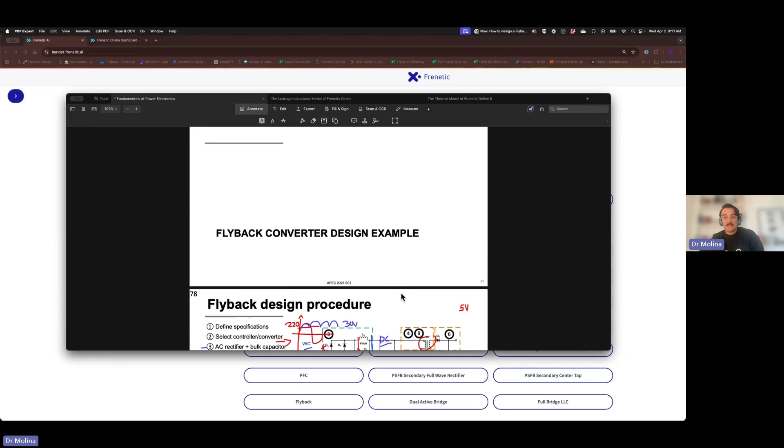The first one was done by Pradeep. I'm in contact with him. He's an amazing power electronics engineer and manager. And the other one was by Brian King, who did an excellent presentation. And they explain a procedure for designing a flyback. They talk about the specifications, choosing a controller, then, considering that the flyback is connected to the grid, choosing the AC rectifier plus the capacitor, and some basic calculations for the transformer that are going to affect the rest of the design.

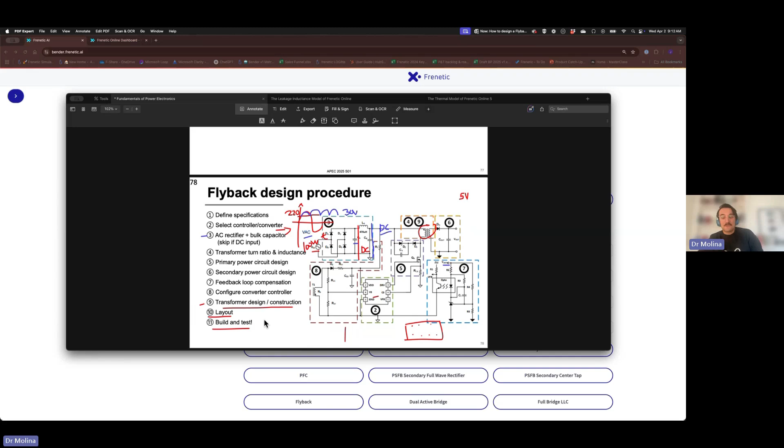And then choosing the semiconductors, closing the feedback loop, and then there is a point here, the transformer design and construction. We will go more in detail. So for this example, they choose a plug-in air quality monitor of 10 watts, and then they create these specs.

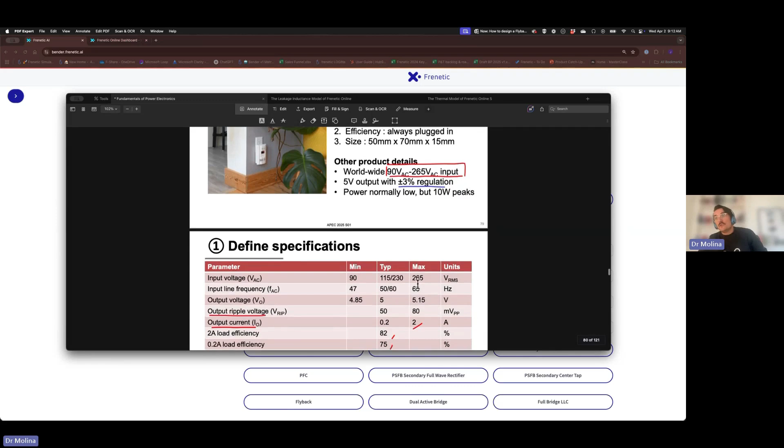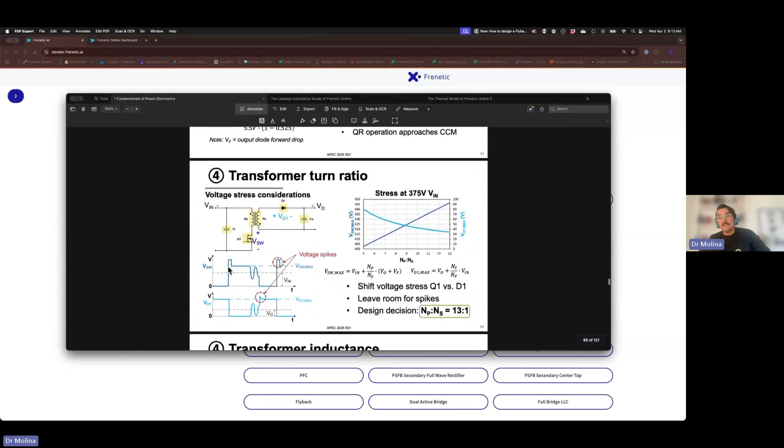So when you analyze all these steps here, if you take a look at this presentation that probably will be online at some point, free for everyone, you will see that there are a lot of equations and design decisions and all this stuff. So what I did is I created a Python code for doing all these steps at once. So just putting the input voltage, output voltage, and the power, this system can just create your case.

So if I update this to a 40 watts flyback, and I run this here, we can see the information to choose the right capacitor at the input, and the controller design that actually was the most interesting for me, because this is an IC controller from Texas Instruments for flybacks, and the part that is more critical for me is to choose all the parameters for that controller design.

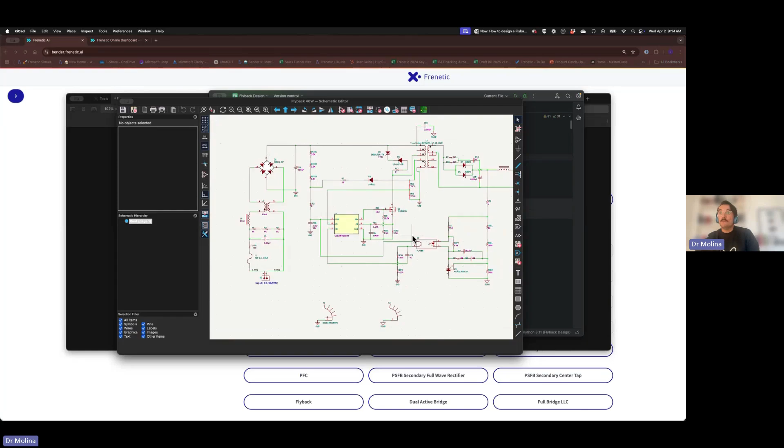So assuming that we want to have some specifications of ripple in the output, current ripple, this chooses all the parameters of the inductors, of the resistors and capacitors for that case. And then I connected all this information with a KiCad project here, a schematic, and now I'm working also on the PCB. I will leave this open at some point for everybody, and it will be integrated in Frenetic AI, where all the resistors are calculated in the other code.

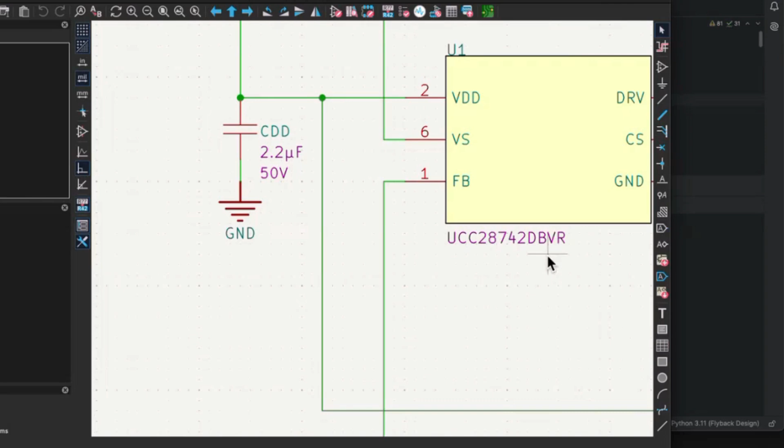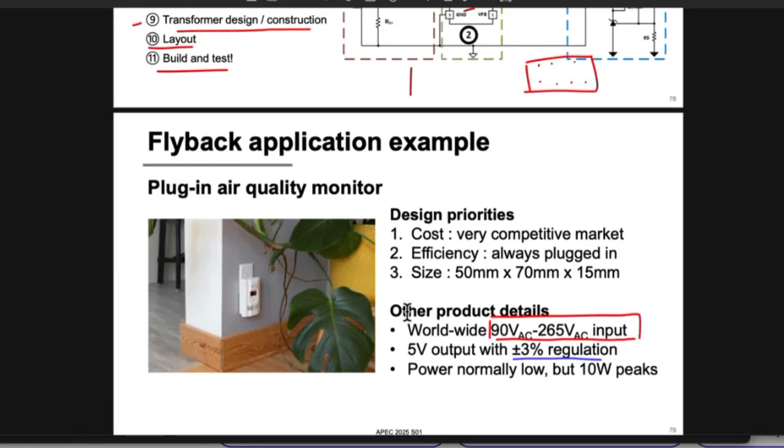So if you want to design this flyback using the UCC28742, this is going to do most of the job automatically. But when I spent a few hours doing this process proposed by TI, I realized that there is one point that is not explained at all. They work on the selection of the device, everything, the calculation of the turns ratio of the transformer.

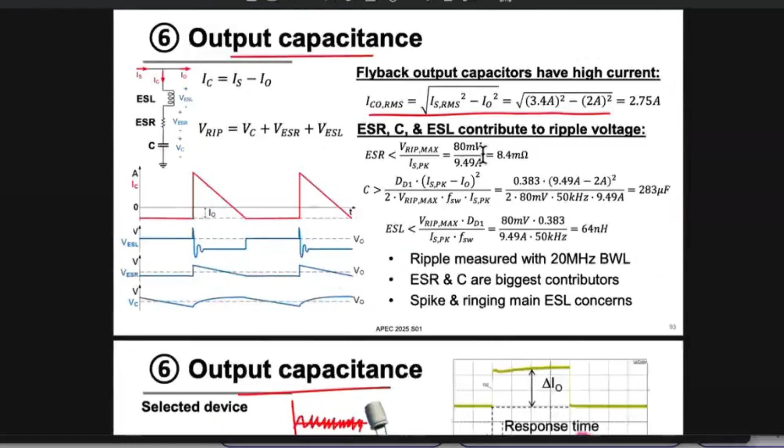But at some point we arrive at the transformer, and I remember in the presentation that Brian said, okay, go to the exhibition hall and look for somebody that is going to help you make the design, because it's not so simple. So you can see here, they just describe the specification for a supplier. So what I'm going to do today is explain to you a little bit what you can do here and why the first step is so important. So take a look at this information here.

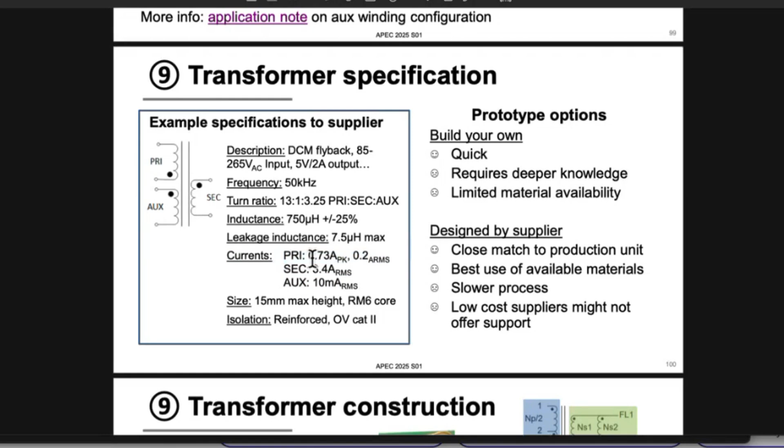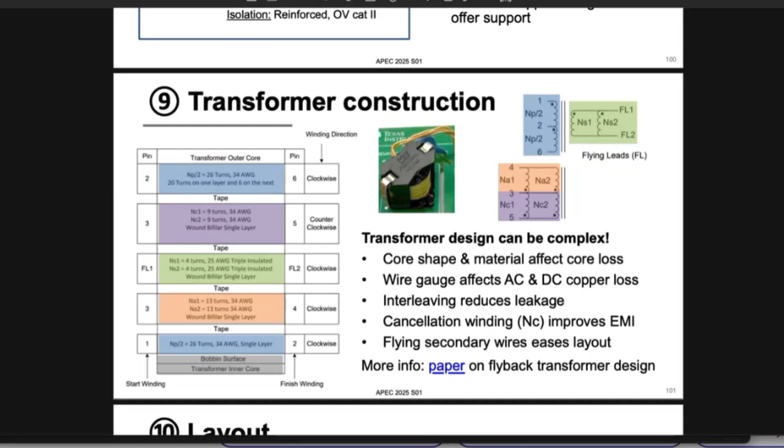So once the design of parameters like turns ratio, inductance, and even selecting a switching frequency are done, then you have to calculate, here there are some calculations of the peak current, the RMS current in the primary, in the secondary, and the auxiliary. And they show you this construction for this transformer. If you look in the paper that they are talking about here, you will see a description. Let me show that to you. You will see a description like this.

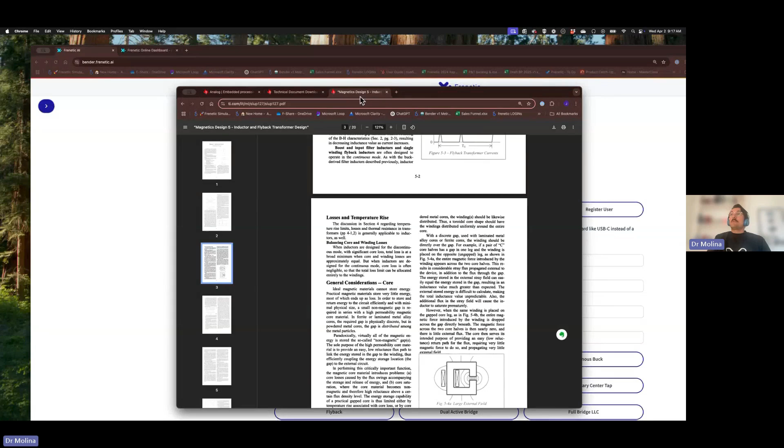Yeah, this paper is more than 30 years old, and it's very, very nice. It explains to you how to choose the core. But if you go into more detail, you realize that the losses, especially the proximity losses, are just a kind of approximation using Dowell parameters. So, we have a clear process according to this TI document for the whole converter, but for the transformer, or the magnetic, depending on how you want to call it,

we don't have a procedure. So what I want to show you today is that for that component, the way that I see that procedure is in these three steps. The first step is that we need to define the waveforms and the operating conditions that we will use for the design. Because at the end, when you're designing a magnetic, you are going to choose a core, choose a winding, and decide how you want both things to be positioned, and then simulate and iterate on how the losses of these selections are working.

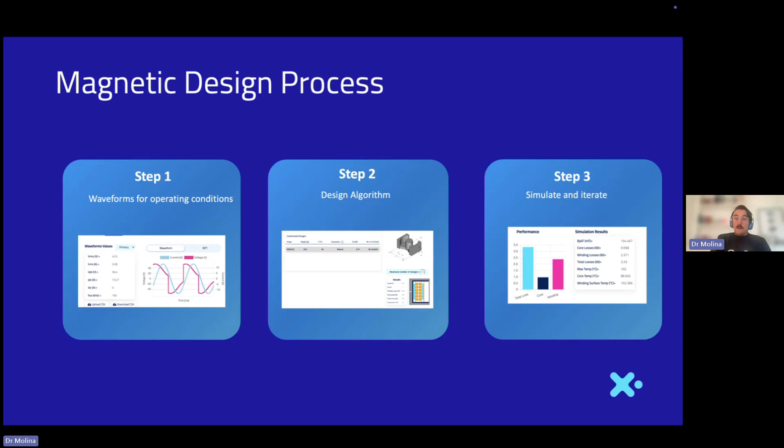In the middle, we have the design algorithm. So if we already have the initial specs and we want a prediction, first we have to make the design. In our case, we have our own algorithm, and every manufacturer or every person can have their own algorithm. But today we are going to focus on step one. I'm going to explain why step one is so important and how it can affect your results at the end if you don't do it properly. So let's move that bar.

So first I'm going to create the design for that spec. Let's say 200 volts input, or that was like a 150 volts input, 20 volts output, and 40 watts.

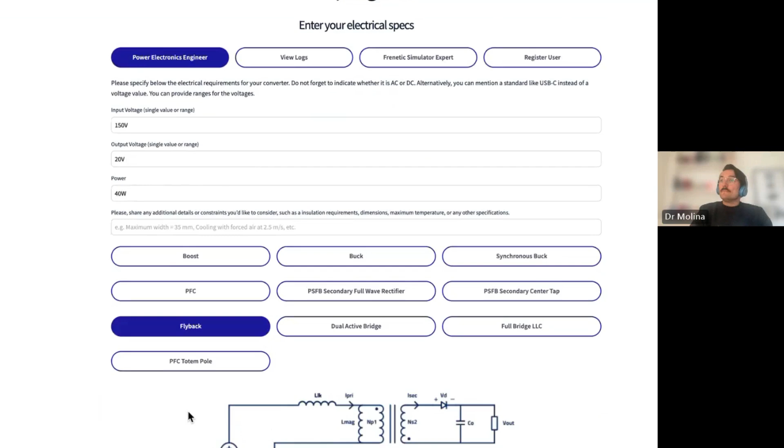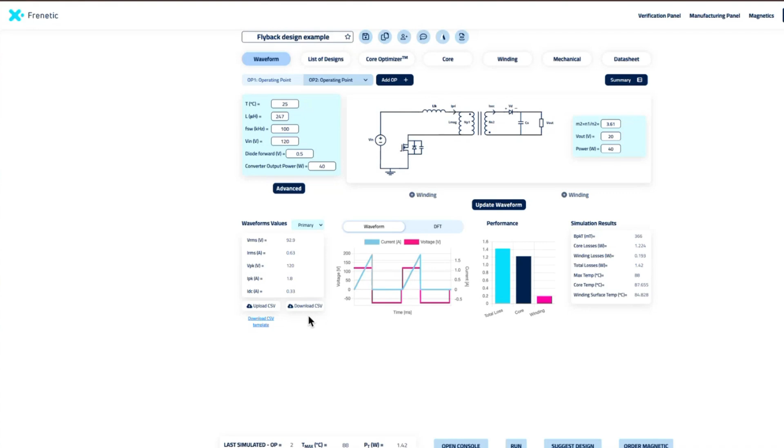And while this is doing the calculation for the design, I'm going to move directly to the flyback case of the magnetic, because here we are just generating the design. But assuming that we already have those values, and I'm using Frenetic because it's our tool, but you can do this by your own, or manually, or however you want to do it.

So, as you can see here in this flyback, what we have here is some specifications regarding the parameters like the inductance, the frequency, voltage, and power. And these specifications, which correspond with the specifications that we saw previously in the TI document, are the ones that we are going to use to generate a waveform.

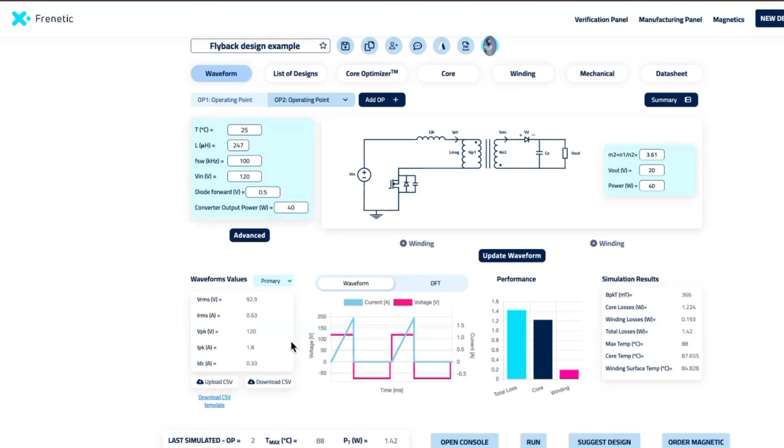20 volts. Let me see what is the proposal of the turns ratio. Turns ratio is 7.5. 7. So as you can see, there are no waveforms. So there are no values to make any kind of design.

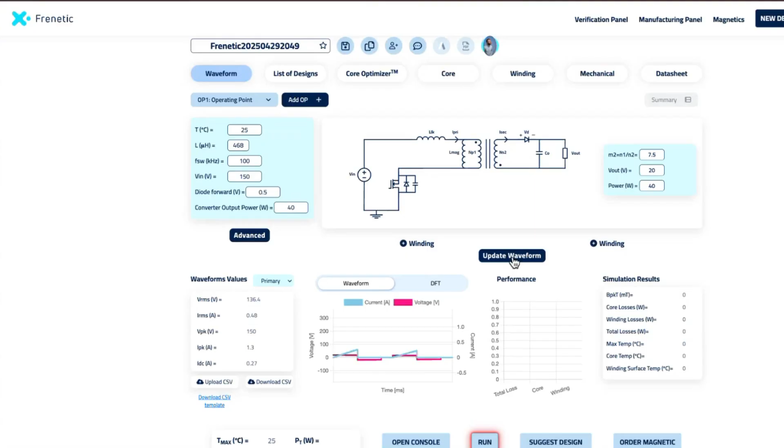So now what we are doing is, okay, now we generate the waveforms. And the most important part here, we generate the values of RMS, peak voltage, peak current, and well, the DC current is not going to be very relevant at this moment, but also we have that value. And we can see that for each winding. In this case, we have only primary and secondary, but you can have more windings.

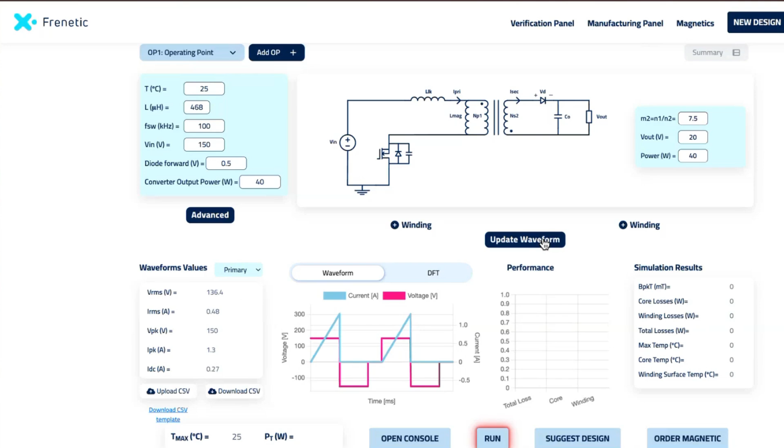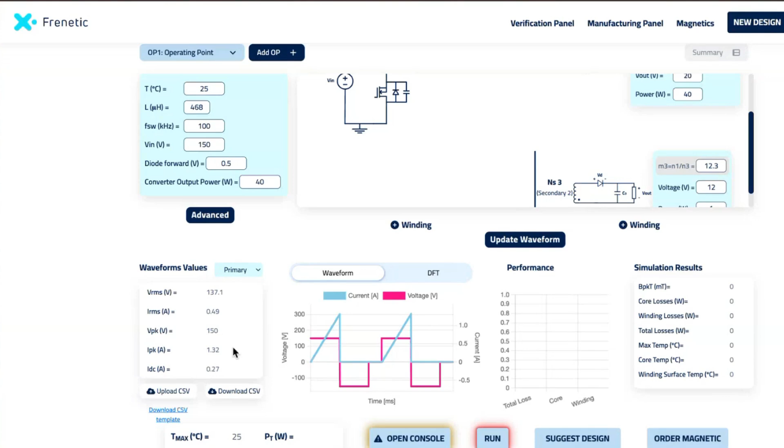Let's say that you have an auxiliary, another secondary that is here for 12 volts and for just 1 watt. So if you have that, then you have another secondary. And again, you have to check here the RMS current and all the information for doing that design. And why is this so relevant? The main reason is that these parameters are going to be changing when you're doing the design in all the conditions.

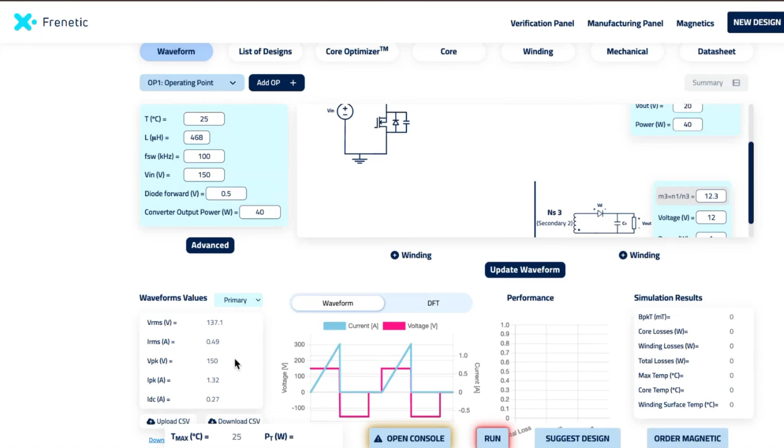Let's say that you're doing the design for that controller that Texas proposed. If you check the controller, you realize that the controller maximum duty cycle is 0.5, and that there is a variable frequency depending on the load. So there are some frequency variations. So if I change, look at this number, for example, here, 0.49, and the RMS voltage 137. If I change this value here,

this is changing, and this is changing just because I changed the frequency, but it's going to change for every point. So if I add another operating condition and say, okay, this is going to be 50, what I can see in a kind of report is that the values for the peak are going to be very different. For example, in the secondary, the peak current difference is 50%. So it's very, very relevant.

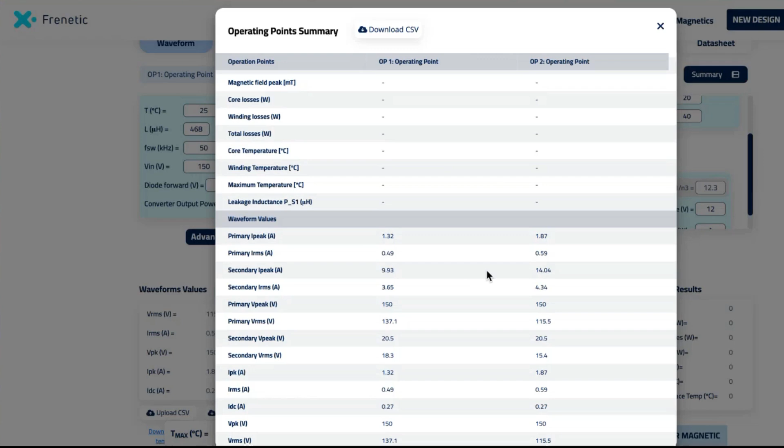And the problem is that if you are not taking all this information for your design, it's impossible to really get the calculations that you will need for the future, for the predictions of the losses and everything. So, for example, let me create a design here. If I create a design, this is my step 2, and step 2 is using our algorithm, but you can use your own algorithm. But I'm going to use it for showing you the impact on the losses for those cases.

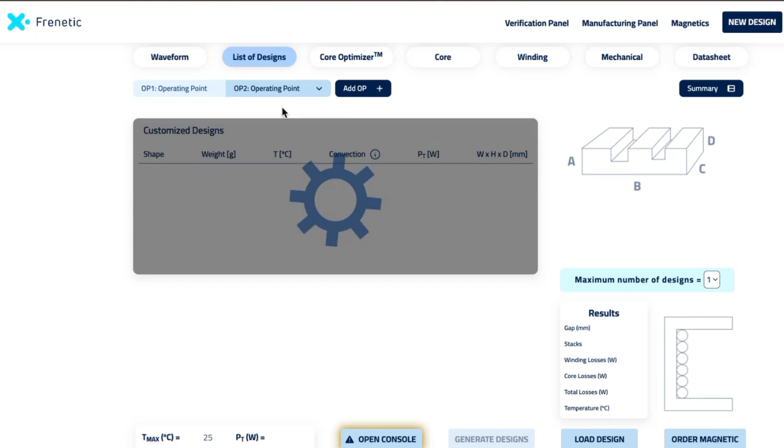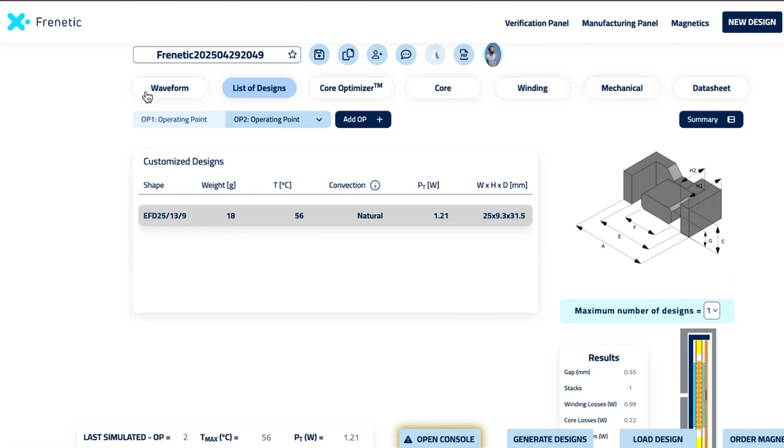Let the design finish. Here we can see, okay, we have a design. Let's load the design. So now we have used the conditions for the design on operating point 2, that means 50 kilohertz. And now if we analyze the losses for these 50 kilohertz and 100 kilohertz, sorry, that was actually in point 1.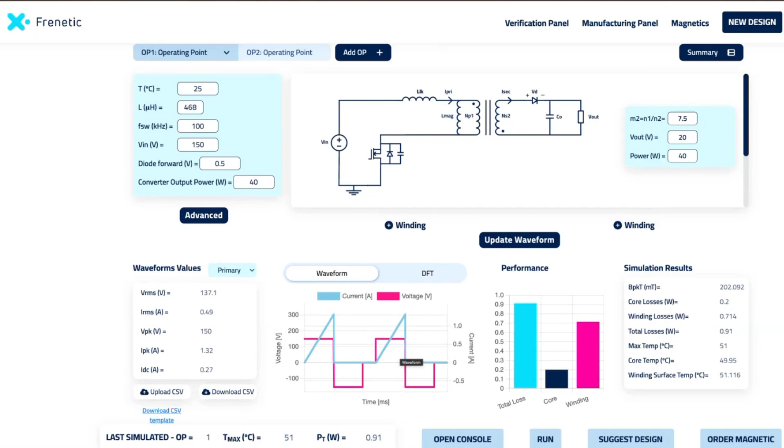And maybe you are thinking, well, having the RMS value and the peak value for a flyback triangular waveform is not very complex, and maybe I can have a spreadsheet for doing this. And it could be. So you can do that, and that will help you a lot for doing the design. But let me show you another case where that is going to be very different.

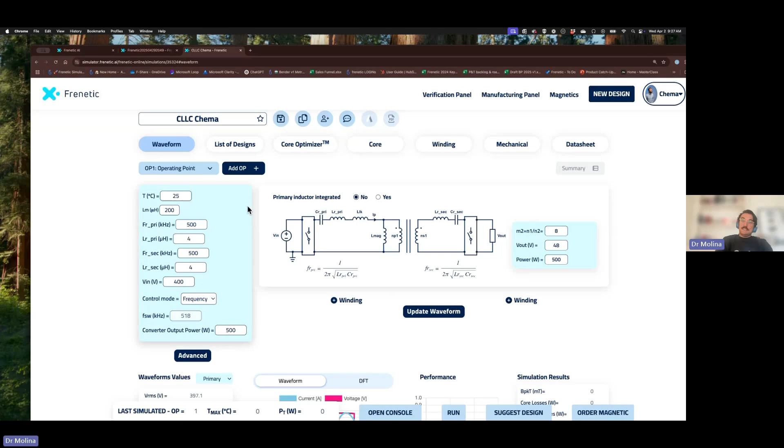So imagine that instead of a flyback, you're going to have, for example, a CLLC design. If you're having a CLLC design where you have 2 resonant frequencies in the primary and the secondary, you have a switching frequency that moves depending on the power. These values here are extremely complex to calculate. So this is very difficult.

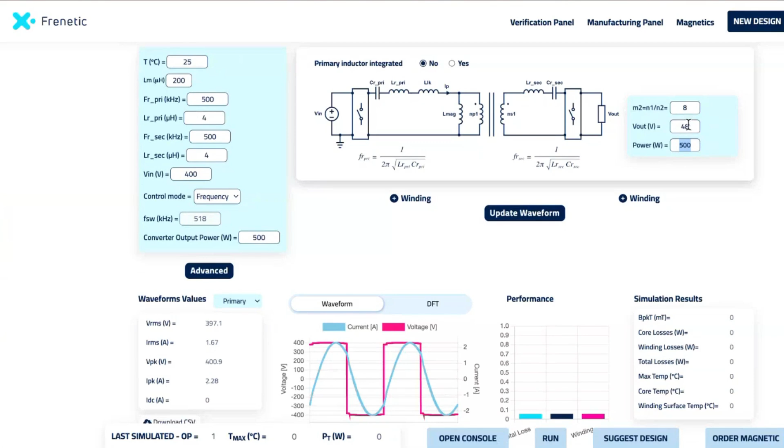So every time that you are doing a change here, let's say this is a case with 500 watts, 400 volts input, and 48 volts in the output, and I do a change here, let's say I'm testing for 400 watts. The values here are extremely complex to calculate because there is now a new switching frequency. This new switching frequency is changing these values, and you have to consider all the resonances and all the things. So that's the reason step 1 is very important.

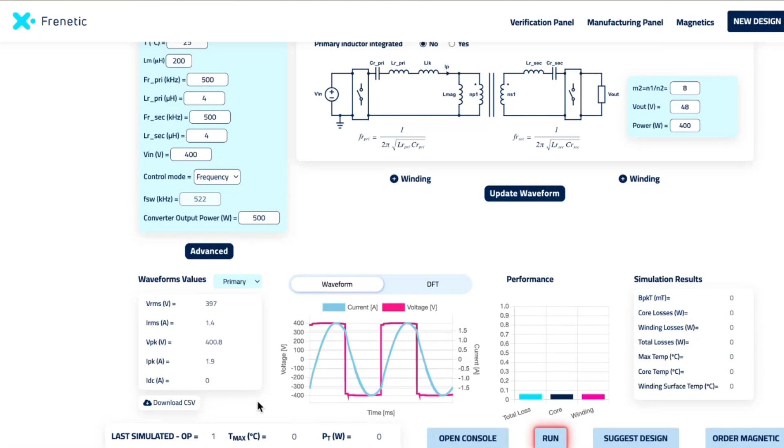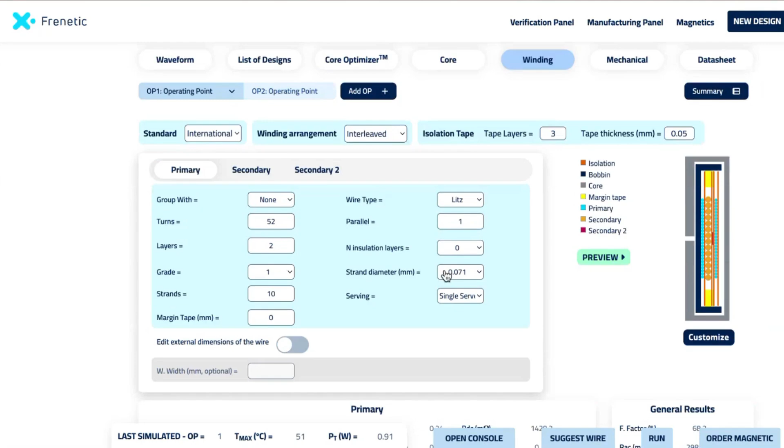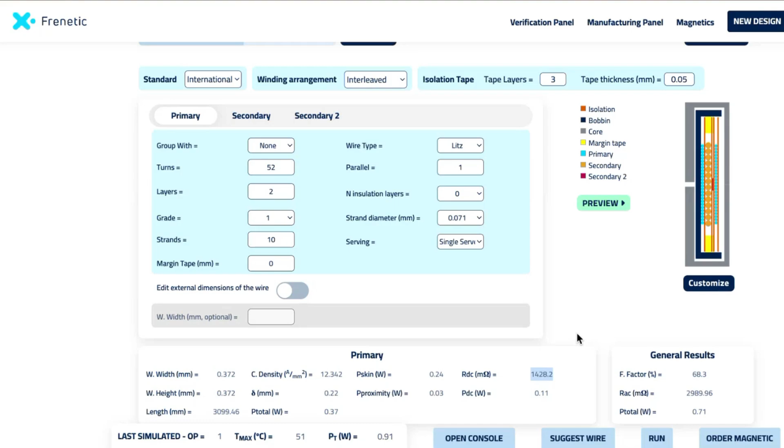But once you start to have, for example in this case, an interleaved case for reducing the leakage inductance, what you will see is that the relation between AC and DC is just not as simple as a coefficient. You need to really take into consideration what is the current through each of these turns, what is the current in the other secondary, and then calculate the proximity losses and the effect between one and another.

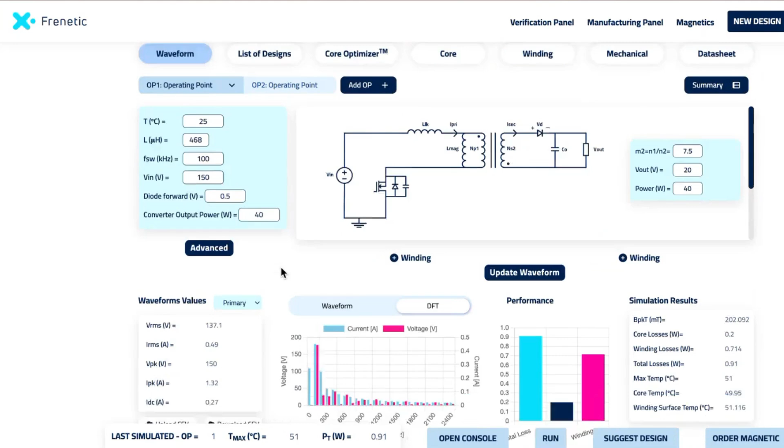And the crazy thing is that for a flyback, primary and secondary are not conducting at the same time. So you have primary conducting and secondary is, not dead, but at 0 current. And the other way around, and you have the third auxiliary that is conducting all the time because it's supplying the chip, for example. So it's extremely complex to calculate the losses here due to the current. But if you don't have the currents and the harmonics of those currents, it's going to be even more difficult to calculate the losses accurately, especially when we are talking about high currents.